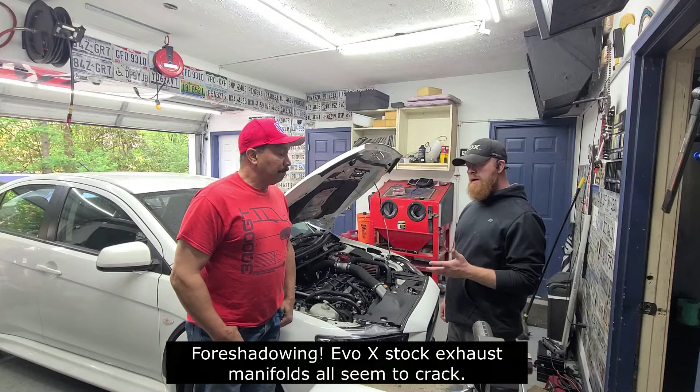Hey Morgan. Hey Jeremy. So today we're working on this 2010 Evo X SST transmission, and you can tell us a few things that you've done with the car so far. So we got it in here the other day and we were getting ready to put the wideband O2 in it and noticed that he had a couple of exhaust leaks. So we had to send it back out and get some exhaust repaired, because there was a crack in the manifold and a crushed exhaust pipe, and neither of which are conducive to anything we're trying to do. So we got those repaired and brought it back in.

Okay. Since then we've added a high flow fuel pump, AEM, in the stock location. It was really nice. I won't say easy to do because it's a lot to take apart, but it fit in really well. We also added a 3-port boost controller, which gives you a whole lot better and smoother control over your boost. Yes, more boost control means more better.

We also put in an AEM wideband gauge in a really cool looking 3D pod that somebody printed that fits in a vent. So kind of out of the way. It's still nice looking. So we're kind of all cleaned up and put back together. And Morgan, what are you doing next?

All right, so now Jeremy's got the ball rolling. I'm going to pick up the baton and start getting down to the tuning. With the AEM AFR gauge in there now, I'll be able to wire that up so that we can start to read the AFR data into EvoScan, which is going to be a very important part of our tuning. Then we're going to put an initial calibration on the car, just kind of get it running, validate that everything is working within specifications. Once we're done with that, Jeremy's going to drop in the Injector Dynamics 1000cc injectors. It's about twice as big as the stock injectors.

We're going to go back, remap all the fuel tables, get this car starting, idling, cruising. All of that within the fuel tables. We're going to manage all of that for today. Additionally, we're going to work on this MIVEC, so we're going to start to see more torque down low and improve response from the throttle.

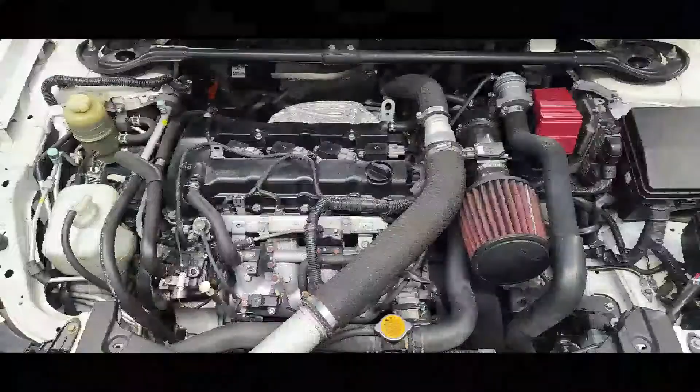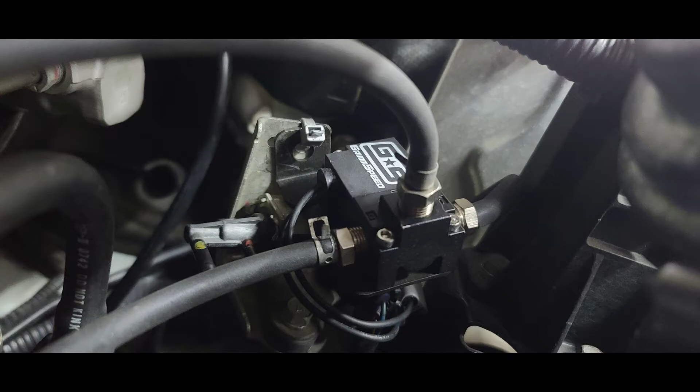So now it was time to get to work. Jeremy got the injectors and the GrimmSpeed 3-port solenoid installed. Then I got to play with wires and get the whole serial, the USB wideband output thingy connected and reading properly into EvoScan. So it was time to drop an initial calibration and get the car on the road for some data logging.

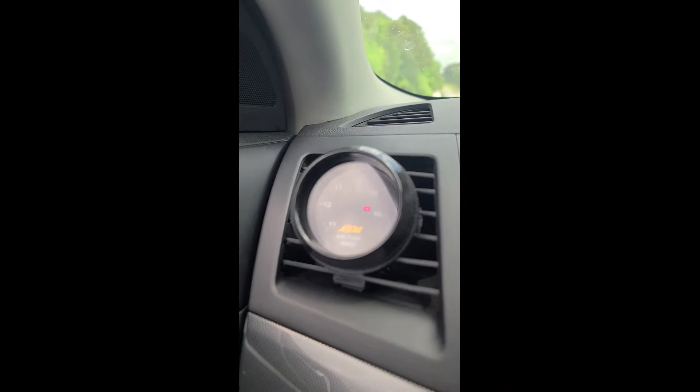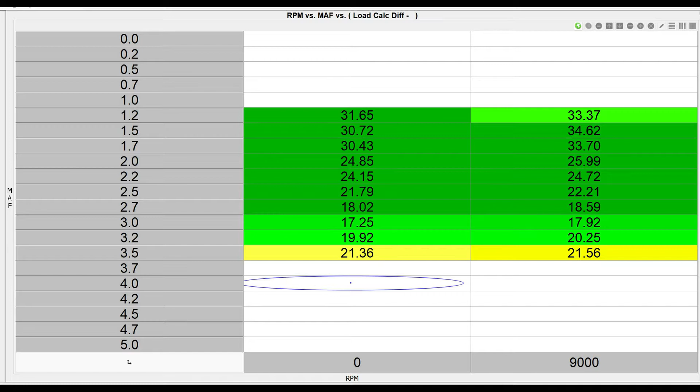One of the interesting things about the Evo 10 is that it uses both MAF and speed density based values in its load calculations. Kind of a best of both worlds approach. I decided to stay consistent with that for the closed loop portion of things, but I modified the MAF scaling tables above, say, 2.5 volts so that the car would run in speed density mode only during boost. We got the initial load registration in line, and then we went to work on the fuel tuning.

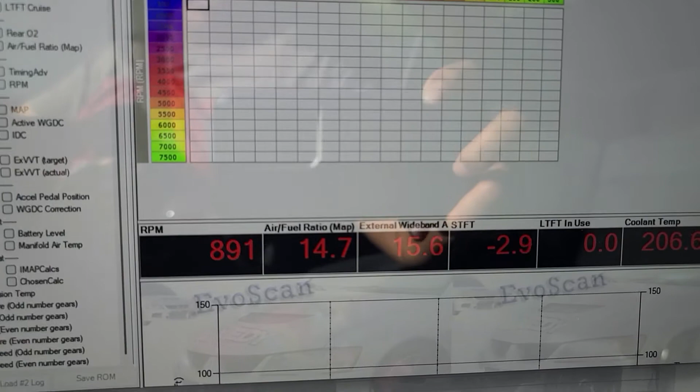Right, and now we're idling under our latest calibration 005. Wideband is looking good. Short-term fuel trims are looking good. Alright, pretty pleased with that.

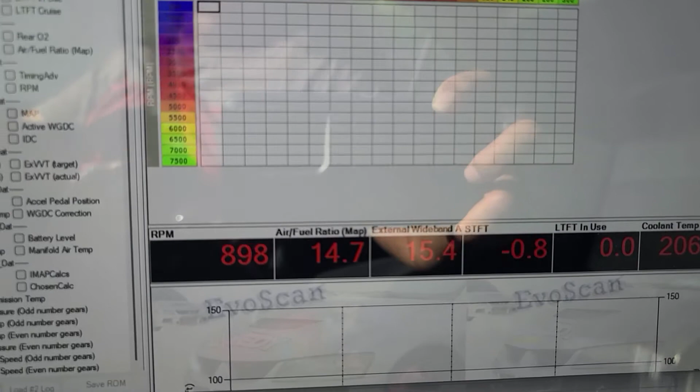Okay, and so after a few revisions on the fuel maps, we have things pretty much dialed in for the closed loop portion of things and a little bit of part throttle. So we're looking at this right here. This is our short-term fuel trims. Everything is definitely within the plus minus 5%. Many things are very, very close.

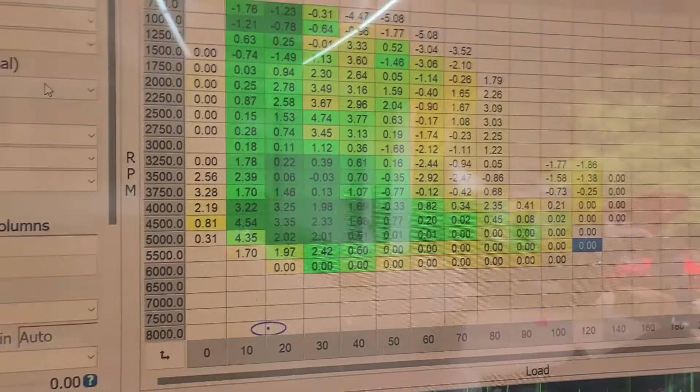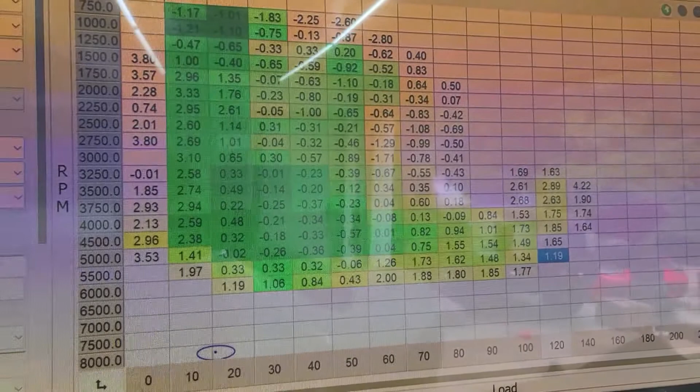And then we come over to look at our AFR. AFR is pretty much on point where we would like it to be, in that 14-15 range, and then the AFR error is also very minimal, less than 1% in most places and less than 3% overall. So pretty good results so far with the fuel tuning. So on to the next step.

Now we're going to work on the pass-through CAN Teach-In to update the SST. This is something that should be performed, I forget the service interval exactly, but it should also be performed every time you tune the car.

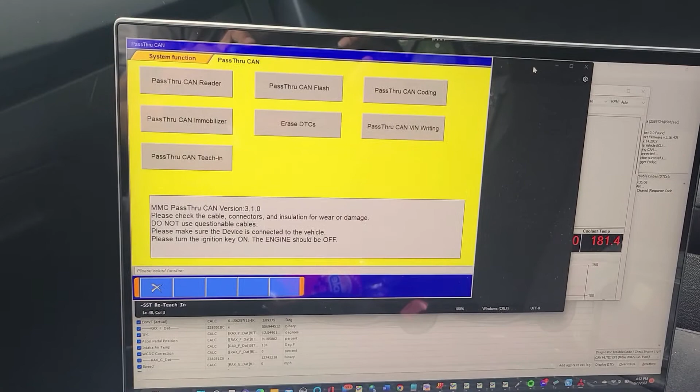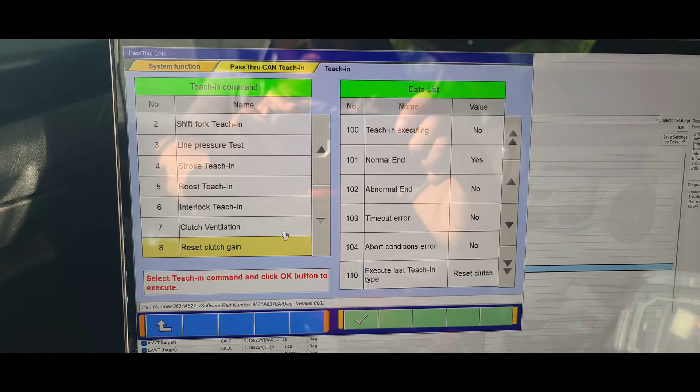Being a true dual clutch transmission, the MRs equipped with this sports shift transmission do require proper maintenance and use. It is recommended to follow the Japanese service intervals rather than those printed in other markets. Driving the car in S Sport mode is the way to go, not only for the most fun, but also for the life of the clutch packs. Performing this SST Teach-In allows for the transmission to be recalibrated according to the Mitsubishi specs. And now it's time for boost Teach-In.

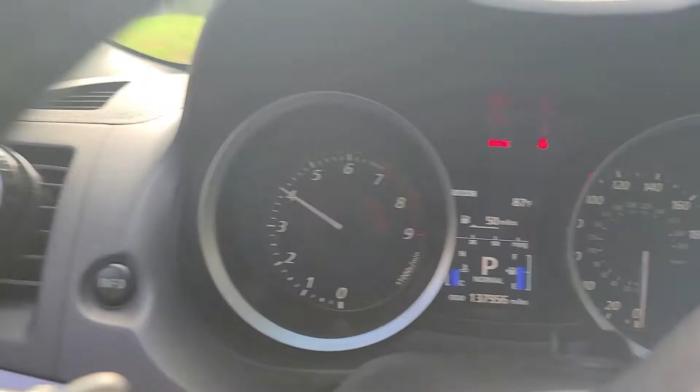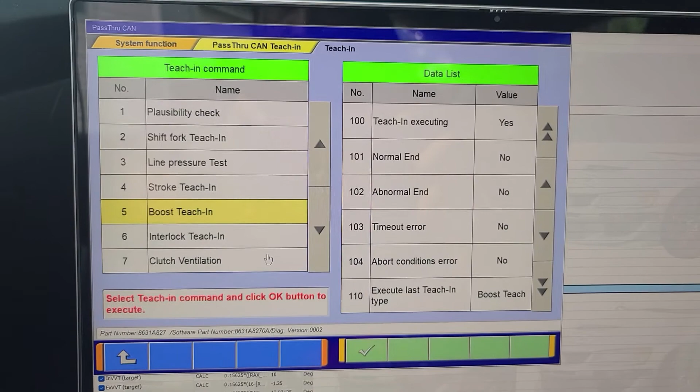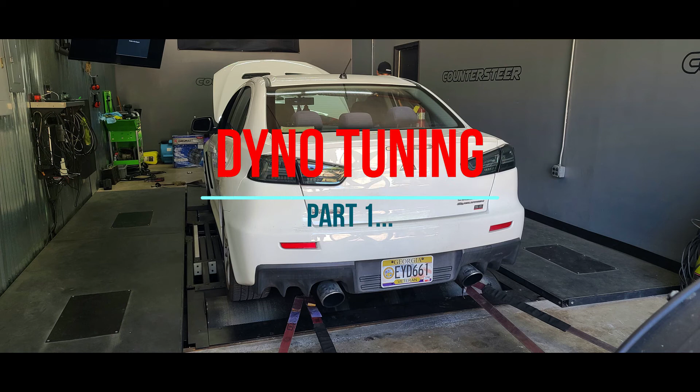With the exhaust issues resolved, performance parts installed, and the initial calibration complete, we booked some time at Countersteer to finish the rest of the tuning on the Dyno.

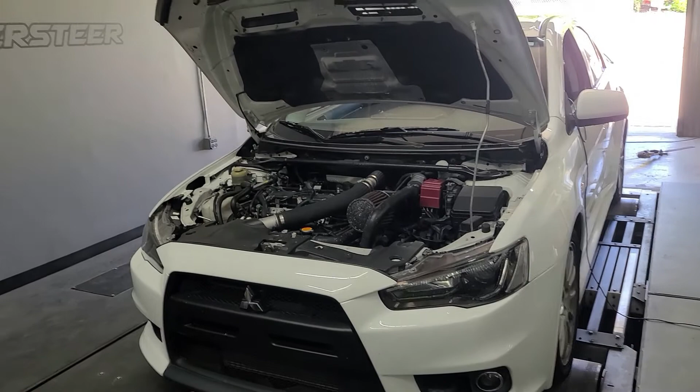Today we're at Countersteer. We have brought with us a 2010 Evo 10 MR, and we are just getting started. Got things strapped down on the dyno, made our first pull, and we're going to be working on boost tuning today, getting the boost, wide open throttle fuel, timing, and try to put a wrap on this car for this stage. So time to get down to work. Here we go.

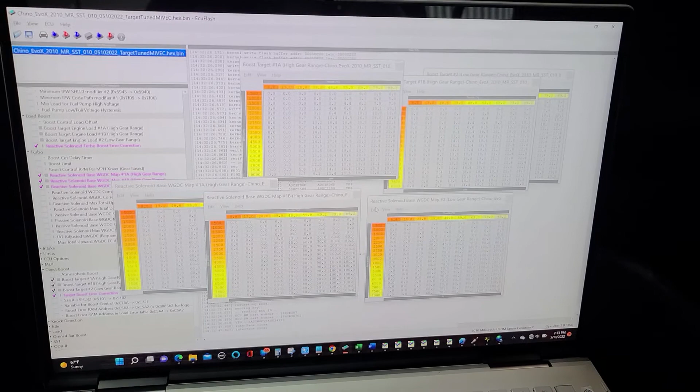Alright, so we're working on the wastegate duty cycle, trying to get this car up and into a good boost range. About to go make another pull, and we'll see what we get.

Okay, so one of the things that we feared has happened, which is the weld that was put into the exhaust manifold has formed another crack. I don't know if you can see that here, but we'll try to bring it in on there. There's a crack on the right side all the way down there.

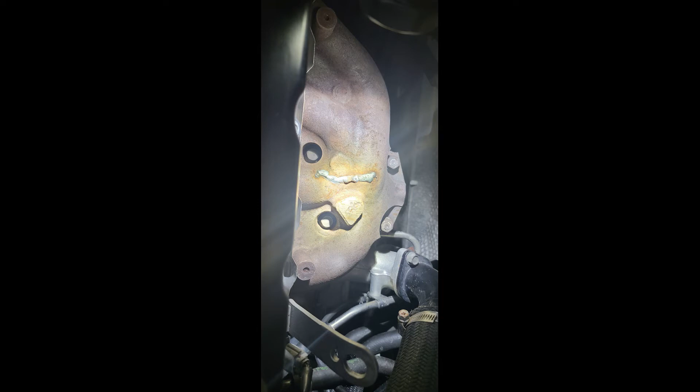Okay, so the exhaust manifold came back to bite us. This is one of the weak links in the Evo 10s, and a lot of owners report getting these cracks over time. Replacement with an aftermarket manifold is a better option than attempting to weld it, as you can see. As it were, this crack was sucking away all of our power, and that was reflected in the dyno results.

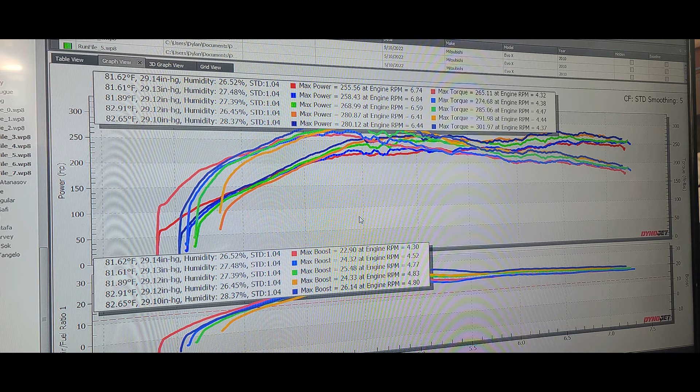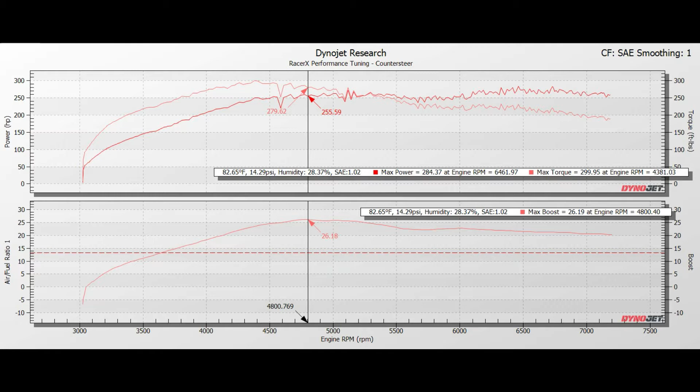With torque at a maximum of 300 foot-pounds and horsepower peak of only 284, we were far below our anticipated results, which we thought would be in the mid-300s on both. We ended up calling it a day and let the owner go and source and replace the manifold before we could get back to the tuning.

Alright, so let's talk a little bit about tuner safety when tuning an Evo X MR. So while we're doing the wide open throttle pulls, we get to take a moment between the pulls to evaluate a number of things and kind of see what's going on with the car. First thing we want to do is we'll just kind of isolate the pull itself.

So we'll grab a TPS so we know the throttle position was maxed out, and then let's grab the RPM, which gives us a chance to kind of see the RPM range as we were doing this fourth gear pull on the Evo here. So as always, the first course of action is really to evaluate knock. Nothing is more important than knock evaluation when we're doing these pulls. Everything else really becomes a moot point if we're finding out that we're getting huge discrepancies in knock counts and so forth.

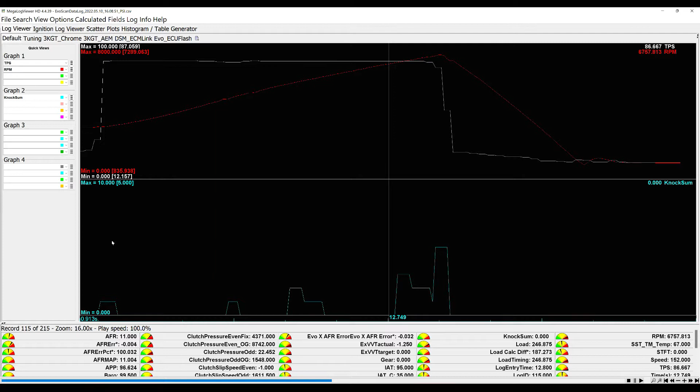So we're going to pull knock sum, and the first thing we're looking for, of course, is to see if we've got any counts. Counts of 3 or higher are the ones we're going to be concerned about. Here we have a count of 1, it's negligible. Another count of 1 is negligible as we're kind of working our way through the RPM range. Once we get down here, we do see a count of 3 at about 6,000. So we're getting near about red line, almost 7,000 RPM.

And another count of 5 here. So these are ones that we're going to be looking at and trying to evaluate what's going on, whether or not we want to reduce some timing here or otherwise. A couple of the values that we'll look at when we're doing this bit of knock evaluation is the knock base and the knock change.

Now, in this log, we didn't actually record the knock change and the knock base, but had we, I can see this is 0 here. But the knock base is essentially like your knock floor, and what we're looking at is the difference between the knock base and the knock change. That is to say, if the knock change exceeds the knock base or our floor, and again, we didn't record these here, then we will evaluate that against any knock sum that we saw.

If that knock change exceeded the knock base, then we can be pretty well assured that we did experience a significant knock count during that time. And typically what we'll do during this time is we'll start to look and see what else was going on, how much boost were we running, and how much timing did we have during the course of this knock event. So we'll look at the boost, and we'll look at timing advance here.

So we can see that as we were in the upper 6,000s, almost 7,000, we were holding about 20 pounds of boost, and our timing was about 15 degrees of advanced timing there. And then for our 5 count of knock, we know that we were at about 16 degrees of timing. I think I saw once here 17 degrees of timing. So that's something we can go back and evaluate. Maybe we're going to reduce the timing in this area and see if that impacts us.

All of this is very good news. It looks like our clutch slip speed and our clutch pressure were both well within the range of what we'd expect them to be throughout the course of this pull. So that's good news. The clutch packs were definitely being taken care of, and there were no issues with that during the pull.

Let's see, another area that I like to look at, let's kind of clean up our MegaLog Viewer here for a moment. Whoops, we don't want that right now. Is intake air temperature and manifold air temperature. So let's go and grab these two here. Essentially what we're looking at here, between our intake air temperature and our manifold air temperature, it's kind of a way of evaluating how well our intercooler system is working, right?

So obviously, let's see, manifold air temperature, there it is. So generally what we're going to hope for is that we're going to stay within, let's say, maybe 10 degrees of the intake air temperature by the time we got to the manifold air temperature. So here, early in the pull, we're at almost 4,000 RPM, and our intake air temperature is 93, and the manifold air temperature is 104. So about 11 degrees difference there.

I'm just going to kind of scroll through here. Again, it's 93 and 102. 93 and 102, it's kind of staying right there, 95 and 104. As we're getting out toward the upper RPM here, 95 and 105. So all of this looks pretty good. Here at the end of the run, starting to get a little bit hotter as we're getting to the almost 7,000 RPM range. So we're starting to see the discrepancy get a little bit bigger here. But overall, throughout most of the pull, we're staying within 10 degrees. So it means our intercooler system is working pretty good.

Now, mind you, this pull was taking place on a dyno, so all we really have is some giant fans blowing air at the car. And in real world conditions, you actually have a lot more air coming through the intercooler as you're driving the car than we would have on a dyno. So with this information we're seeing coming off the dyno, it makes me feel pretty good about the intercooler working for this car.

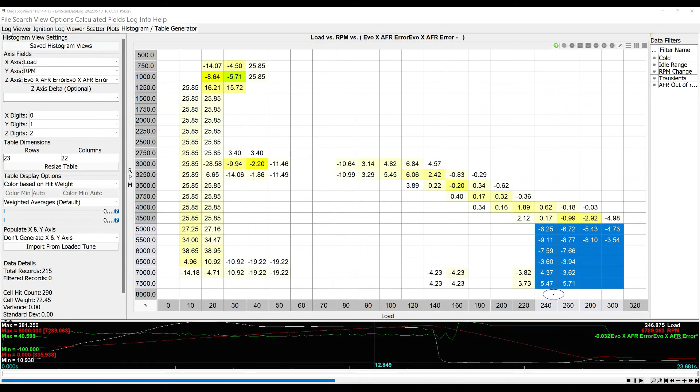Let's go back over to the log view. And here, one of the things we like to look at is the load registration. So we're going to clean up some of these guys here. Let's take the AFR error out, and let's take out the AFR information. We kind of looked at that; we don't have to clutter up our screen too much. So let's grab some of our MAF information. One of the things I'm going to get is actually the MAF hertz themselves, or the MAF volts. That's important for me, and I'll explain why in a moment.

We have the MAF volts, we have MAF calc and MAP calcs. So let's go grab both of those. We'll go to MAF calcs. Here they are, MAF calcs and MAP calcs, and we'll look at our chosen calc here in just a moment, and we'll talk about why that would be important. So let's get the MAP calcs here. There they are. All right, and then the chosen calc.

So, as we talked about earlier, the way that the Evo is set up by Mitsubishi is that it's a combination of both a MAF-based and a speed density volumetric efficiency-based system. And so the ECU makes a determination, let's get the chosen calc, between whether it's going to use the MAF values or the MAP values to determine what to do in terms of load.

So generally, you spend a lot of time working on trying to get your load registration correct, especially as you are under boost, so that your MAP calcs and your MAF calcs are essentially as close to each other as possible. The discrepancy between the two of them is as little as possible. So this way, you have this nice lack of, let's say, oscillation between the two as it's trying to do its thing as you're driving, whether in vacuum or in boost.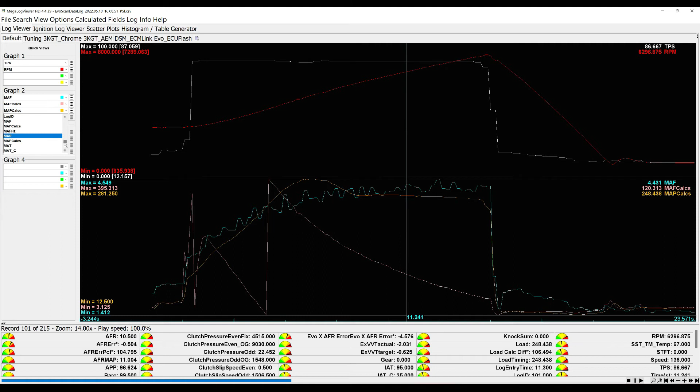All right, and then finally, what we came here to really do, we're in the process of doing boost tuning, and we haven't yet taken a look at how our boost tuning is going. So we're looking at all those things for safety and engine temperature, all the things we want to check and make sure are pretty good, especially the knock. But then we had time to finally go in and evaluate. Let's see what was actually happening with our boost tuning.

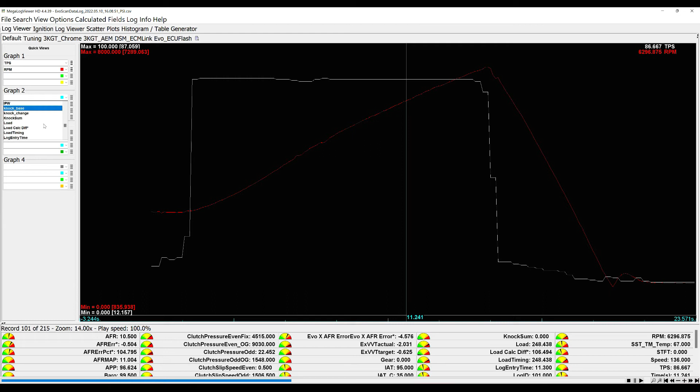So we'll go in here and we'll grab the load. Let's look at load, and we'll look at boost. These two kind of go hand in hand with each other. Talking about boost in the PSI, we can kind of see these two lines are pretty much on top of each other as we would expect them to be. Let's go back here in the pull, maybe up to this area. We'll start right here.

And then let's open up another graph, and we're going to look at our wastegate duty cycle, essentially the active wastegate duty cycle. And then let's look at our wastegate duty cycle correction. Let's go back a little bit earlier. So at about 4,200 RPM, we were running about 21 pounds of boost with a wastegate duty cycle of 75%, maybe 76% wastegate duty cycle, and there was no correction.

Right? So essentially we were saying at this point in time, everything was pretty much where it was supposed to be, or the ECU was not making any corrections. We're saying that 75% wastegate duty cycle that we had added into the table was correct to achieve this 20 pounds of boost at this RPM, at this throttle position.

Now, as we start to move up, we'll grab one of the several tables that talk about what our boost targets were. So our boost targets essentially were, basically wide open throttle down here, as we get into mid to upper RPMs, we were targeting 24 pounds of boost. That was our goal, to be at 24 pounds of boost and see how well we would do.

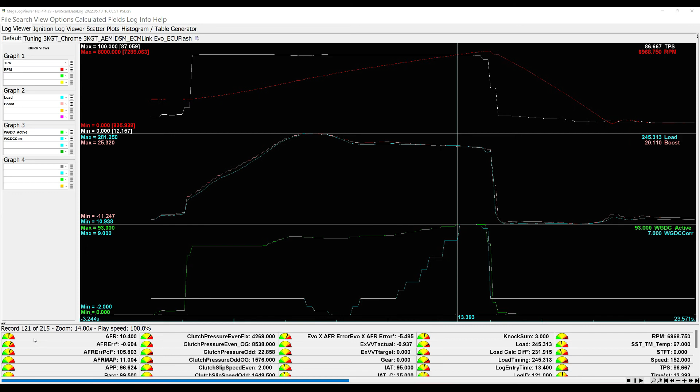Hey guys, I wanted to take a quick moment just to point out something I think is very important. As you may or may not have heard, that Evo that we were working on the dyno was actually stolen a few days after that. Literally stolen right out of the owner's driveway overnight. Now, we got lucky. This one was recovered, and in fact, there was very little to no damage on it. So we got really lucky this time around.